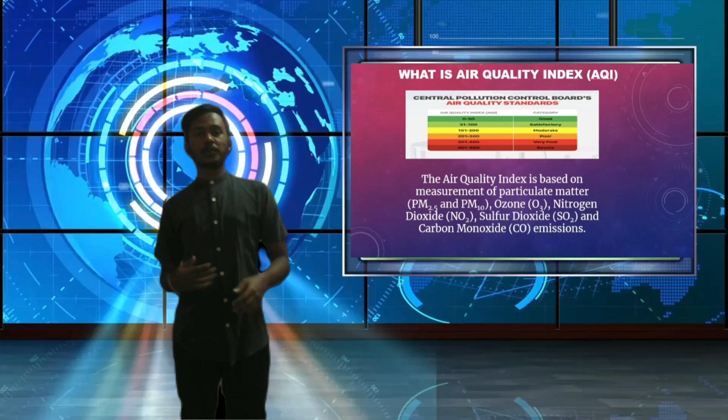Good day, people. Have you ever wondered what is air quality index and also why the price of the fossil fuel in our country is spiking from time to time? Air quality index is a scale which measures the air pollution level which may affect a person's life within a short period of time. And also the price of the fossil fuel in our country keeps spiking from time to time due to its higher demand by our country.

Fossil fuel in our country is majorly used for the transportation sector. Vehicles which use petrol and diesel to propel the vehicle emit a lot of emissions such as nitrogen dioxide, carbon monoxide and also particulate matter. In the year 2005, Malaysia was declared a moderately unsafe country because the air pollution level is quite high. And also in the year 2019, the petrol price increased.

To overcome the problem simultaneously, the Malaysian government has come out with a lot of strategies. One of them is using public transportation. One of the most common and favorite public transportation in Malaysia is the public bus. Similarly, in Kuala Terengganu, a bus named BAS KITe, which is owned by Cas Ligas Sendirian Berhad, is the most favorite public transportation among the residents.

Almost 57,314 passengers use BAS KITe for their daily travelling. Their charges range from Ringgit Malaysia 1 to Ringgit Malaysia 5, which covers 16 hotspot places in Kuala Terengganu, and also extra facilities such as air conditioning and charging plugs make the bus more favorite among the residents. So, public transportation has been successfully implemented in Kuala Terengganu.

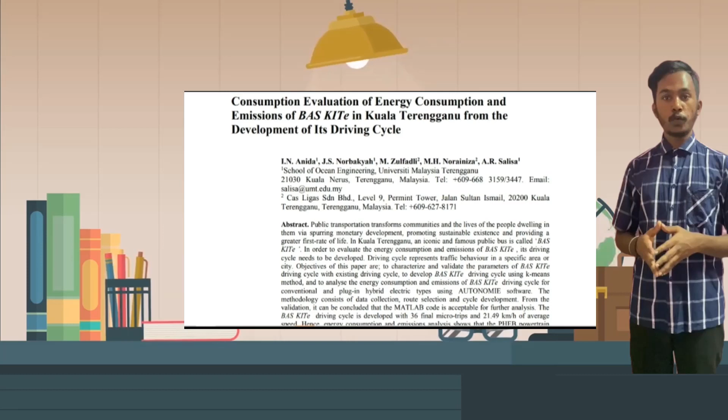Air pollution and also fuel usage are still getting worse. It is proven when, according to Cas Ligas Sendirian Berhad, the amount spent on diesel increased by a year around 31,758 ringgit Malaysia, where the cost in the year 2016 was 144,515 ringgit Malaysia, while in the year 2017 the cost was

176,273 ringgit Malaysia. On the other hand, the concentration of particulate matter at Kuala Terengganu has also increased significantly, around 4%: in the year 2001 the concentration of particulate matter was 50%, while in the year 2010 it increased about 4%, resulting in 54%. Emission and fuel usage from BAS KITe cannot be controlled because it solely depends on the internal combustion engine.

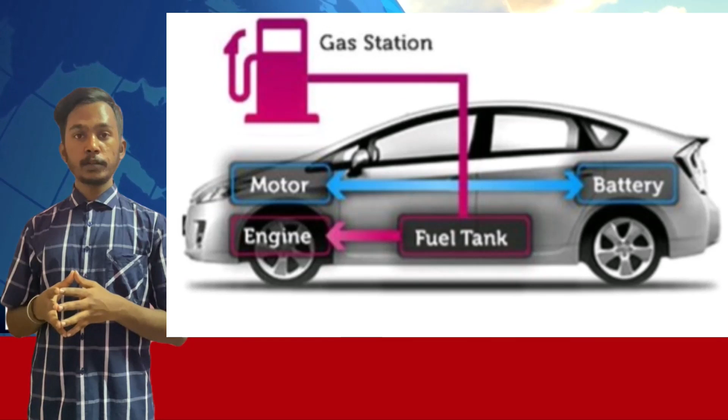To overcome this, manufacturers have introduced a new vehicle topology where hybrid electric vehicles are introduced to replace traditional internal combustion engine based vehicles. Hybrid electric vehicles can be operated using electricity and also fuel to propel the vehicle. Similarly, the BAS KITe plug-in hybrid electric bus is introduced in Kuala Terengganu. The BAS KITe plug-in hybrid electric bus consists of an electric machine, energy storage system and also internal combustion engine.

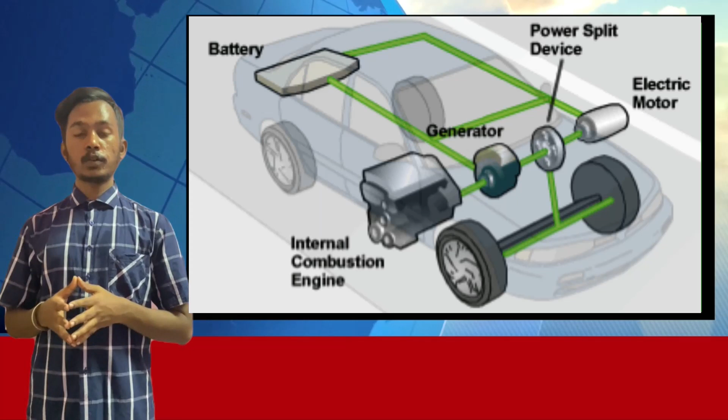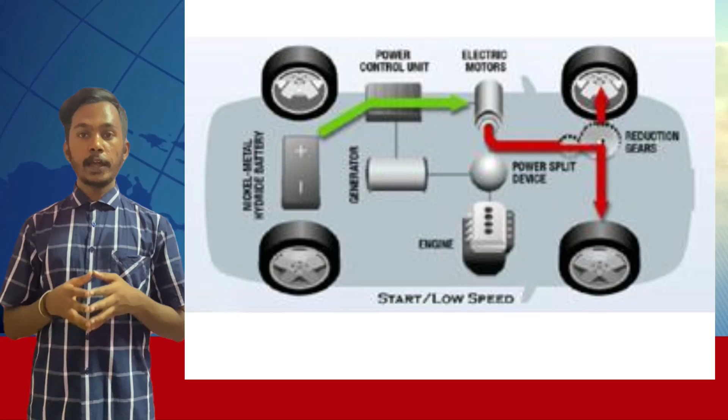The internal combustion engine is the only component using fuel in the entire system. And also, the internal combustion engine is only used during rapid acceleration and when the state of charge of the battery is fully depleted. The energy storage system is the power source providing electricity to the electric machine. The electric machine is the primary engine to move the vehicle. The energy storage system consists of a larger battery pack and ultracapacitor. Also, it can be charged from regenerative braking.

In a traditional braking system, brake pads produce friction with the brake rotors to slow or stop the vehicle. Additional friction is produced between the slowed wheel and the surface of the road. This friction is what turns the car's kinetic energy into heat. With regenerative brakes, on the other hand, the system that drives the vehicle does the majority of the braking.

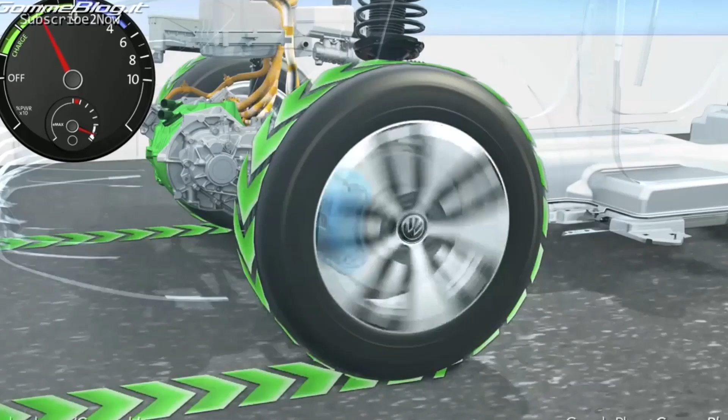When the driver steps on the brake pedal of an electric or hybrid vehicle, this type of brakes put the vehicle's electric motor into reverse mode, causing it to run backwards, thus slowing the car's wheel. While running backwards, the motor also acts as an electric generator, producing electricity then fed into the vehicle's batteries.

In this study, there are three main steps involved. First, to determine the parameters and specification of the internal combustion engine and BAS KITe vehicle. Second, to design a model of internal combustion engine components using the MATLAB/Simulink environment. Third, to validate and analyze the internal combustion engine using Advisor.

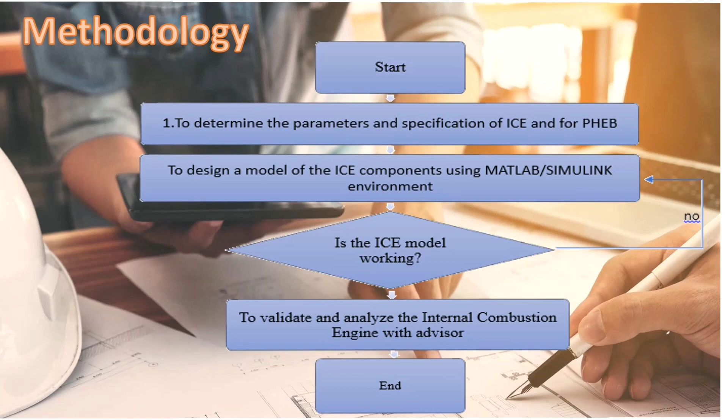The first step is component sizing. Power requirement of BAS KITe vehicle is the first step in this project. To find the power requirement of BAS KITe vehicle, parameters such as bus weight, aerodynamic coefficient, rolling resistance, constant acceleration, track coefficient, frontal area of bus, air density, and gravitational force are required.

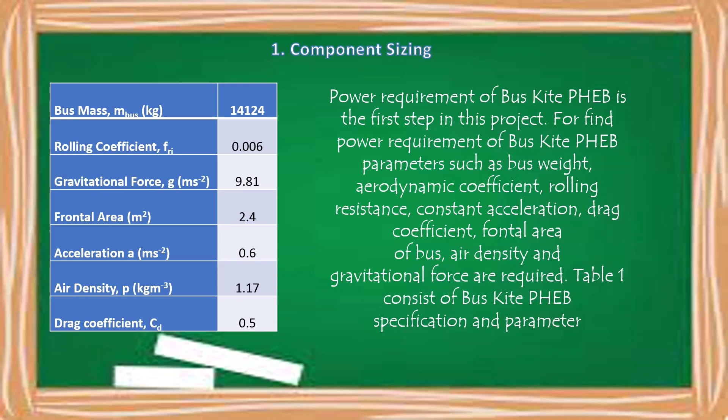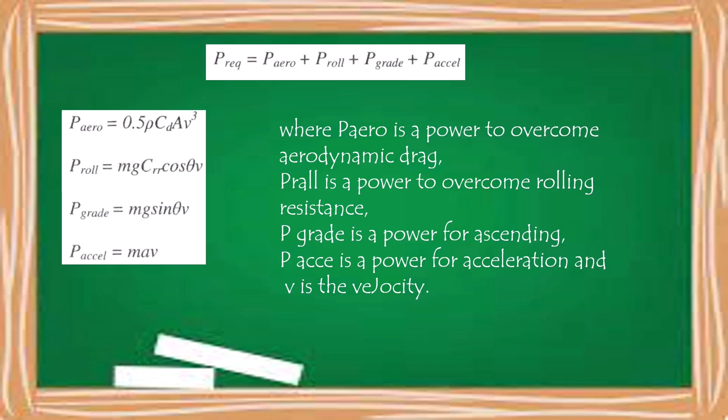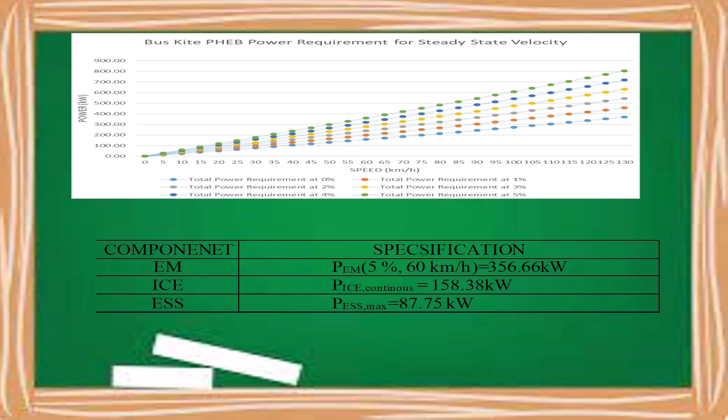By using the power requirement equation and the gradient of Kuala Terengganu road, which ranges from 0 to 5%, the component sizing of bus kita pickup is done. According to the component sizing of bus kita, the electric machine requires 356.66 kW of power at the gradient of 5% and the peak acceleration of 60 km per hour. On the other hand, the internal combustion engine requires 158.38 kW of power, while the energy storage system requires 87.75 kW of power.

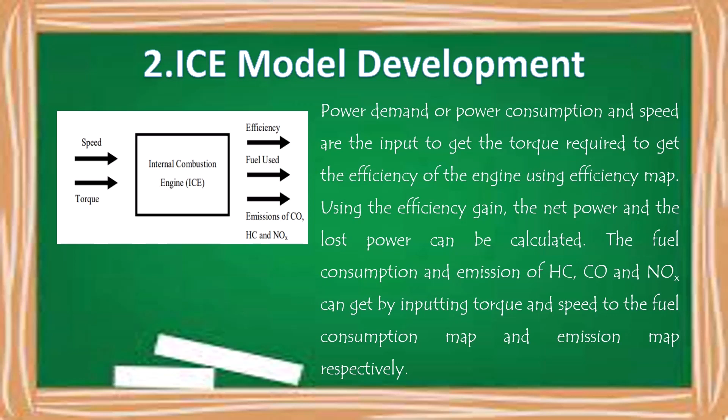Second step in this study is internal combustion engine model development using MATLAB/Simulink environment. Power demand or power consumption and speed are the input to get the torque required to get the efficiency of the engine using the efficiency map. Using the efficiency gain, the net power and the lost power can be calculated. The fuel consumption and emission of hydrocarbon, carbon monoxide and nitrogen oxide can be obtained by inputting torque and speed to the fuel consumption map and the emission map respectively. This is the model of internal combustion engine for bus kita pickup built using MATLAB/Simulink environment.

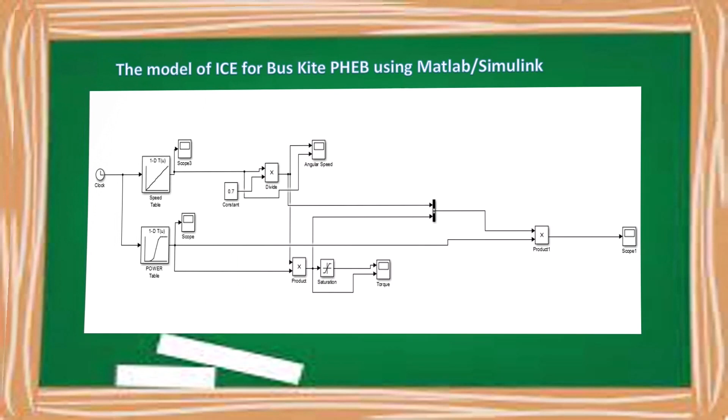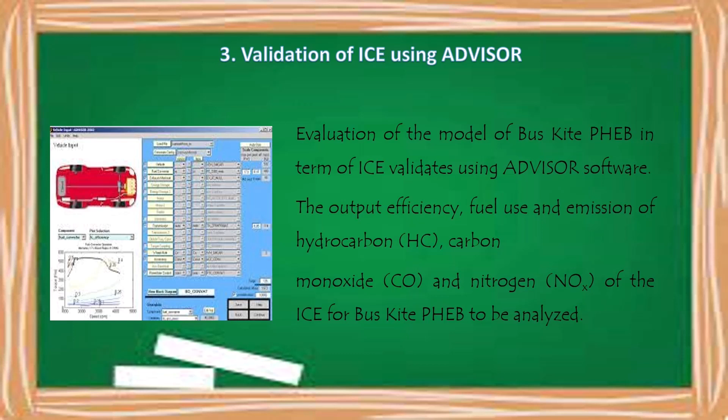The third step in this study is validation of the internal combustion engine using Advisor. Advisor is an established vehicle simulator software in the market. The model of bus kita pickup in terms of internal combustion engine is validated using Advisor software. The output efficiency, fuel use, and emission of hydrocarbon, carbon monoxide, and nitrogen oxide of the internal combustion engine for bus kita are to be analyzed.

Advantages of ICE for Bus Kite PHEB. First plug-in hybrid electric bus in Malaysia. Similarly, at Johor in the year of 2017, the Hino hybrid bus was launched. The difference between these two buses is the energy storage system. Bus kita consists of a larger energy storage system which can travel up to 70 km in all electric range mode, while bus Hino can't since it is a hybrid bus, not a plug-in hybrid electric bus.

Second, able to reduce air pollution by controlling emission from vehicles. Bus kita uses less fuel than other vehicles. The internal combustion engine is only used during rapid acceleration and when the charge of the battery is fully depleted. Third, able to reduce fuel usage. Since bus kita can travel up to 70 km just in all electric range, the fuel usage is less than other vehicles.

Fourth, the internal combustion engine for bus kita has good commercial potential in the market because it uses less fuel and reduces emission. At the same time, it gives the same performance as traditional fully internal combustion engine based vehicles.